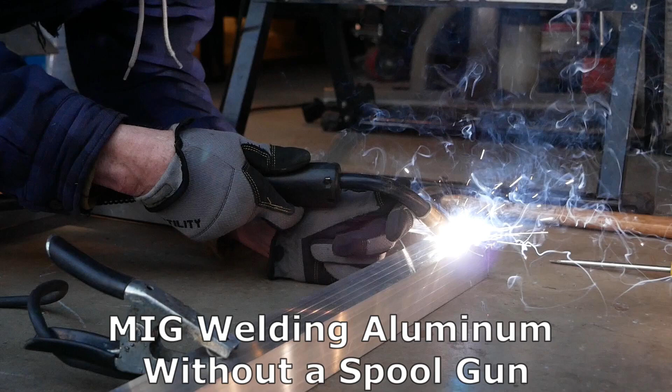Hi folks, today I'm welding together an aluminum frame on which my hot water tank will be mounted, and all that's going inside the lazarette locker on this Pacific Seacraft Orion 27 you see behind me. I'm a pretty much beginning hobbyist welder.

I'll be again welding with aluminum, and this is with a Hobart 140 MIG welder that does not have a spool gun option. So I'd like to go through some tips I learned the hard way. Hopefully it'll save you some time and frustration in using this welder for aluminum. And I'd like to say, please follow safety instructions that you'll find in the manual and not what you might see me doing in my activities on welding. So with that, let's go see what I have for the setup on this 140 Hobart MIG welder welding aluminum without a spool gun.

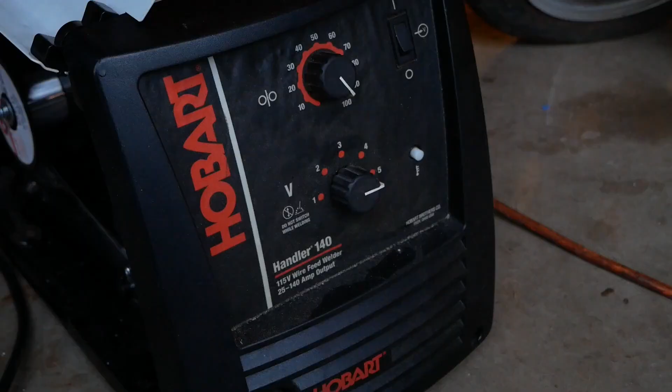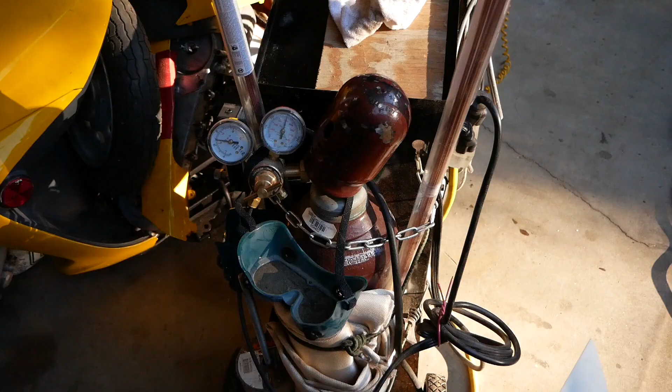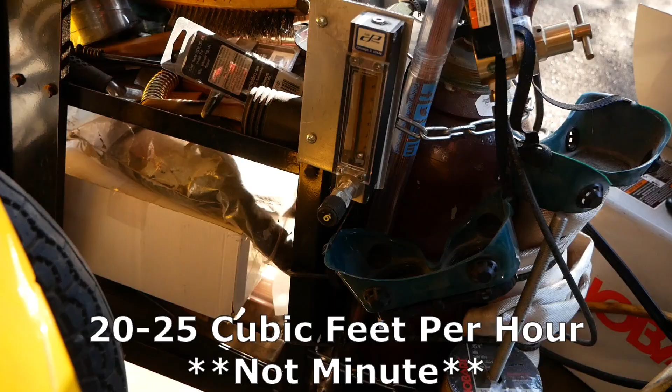So here are my settings. I'm welding again 1/8 inch aluminum angle bar. I'm at 5 for voltage, 100 on the feed rate. As I mentioned, I'm using 100% argon. That's my tank pressure. That's secondary pressure going out of the regulator. And when this is in operation, my flow meter will register about 25 or 20 on cubic feet per hour.

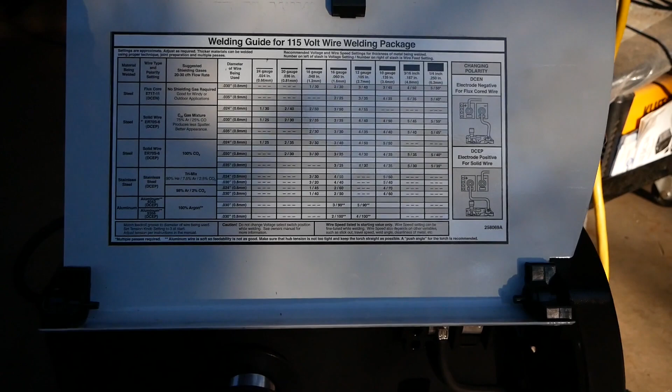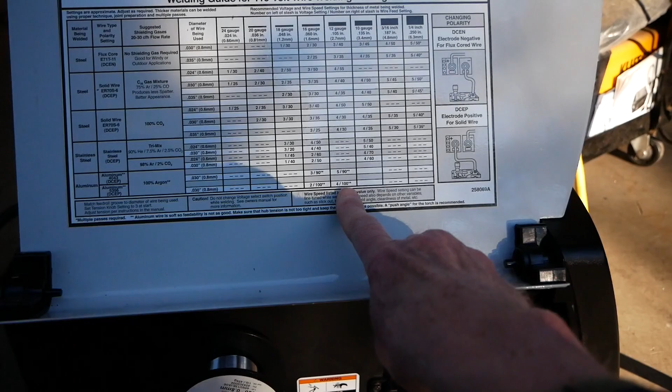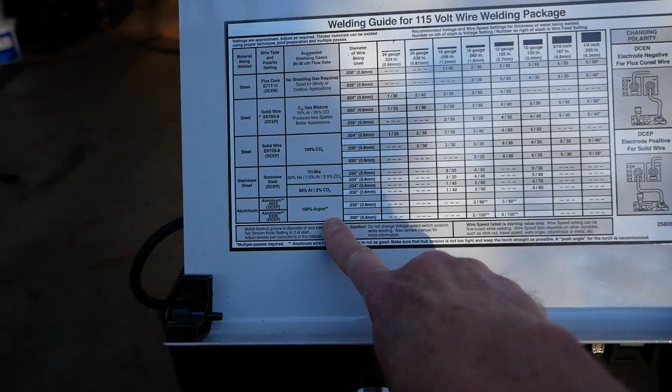As I mentioned, I'm welding 1/8 inch aluminum angle. So I'm a bit at the top of this. I'm running at actually 5 and 100 instead of 4 and 100 or 5/90. I'm using 4043 for welding wire. I'm using 100% argon. And I've set up for DCEP, that's electrode positive, as you can see here.

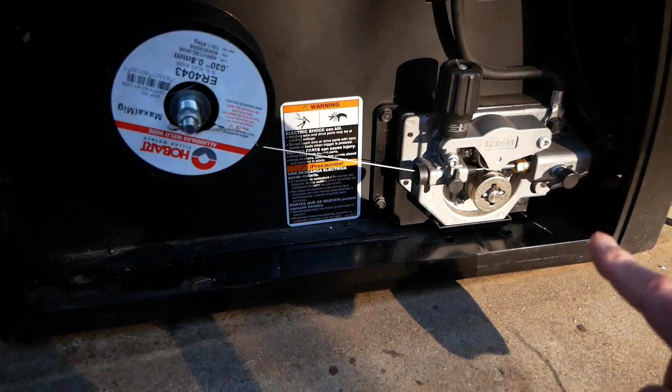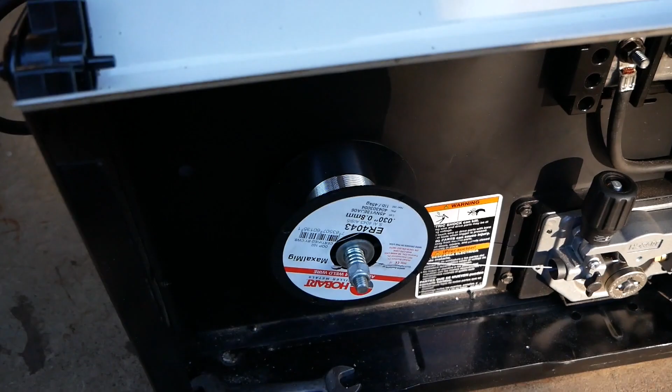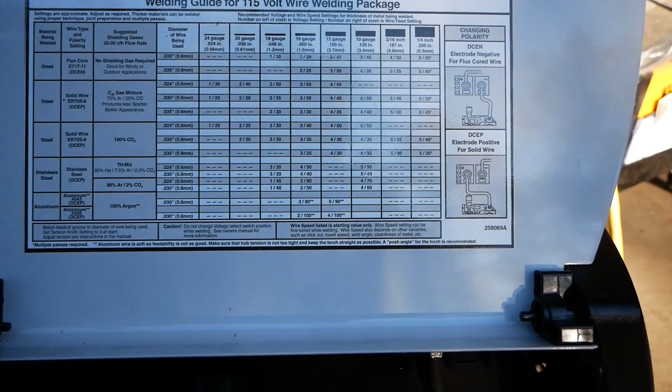And I have my tension at the top of that 3 down there on the dial. I set my groove on my wheel, and this tension on the spring is moderately tight. It's not real tight. Anyway, that's my setup down here inside the box. And 0.030 wire, and I'm using a 0.035 tip.

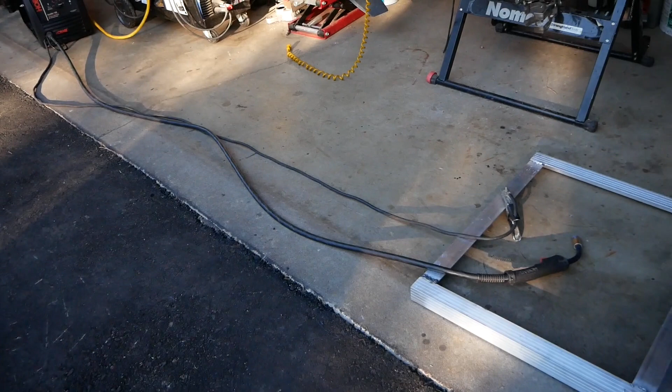Probably the most important thing in running this welder without a spool gun is to make sure that torch cable, which is about 10 feet long, is about as straight as you can tolerate. You will need, of course, to bend it a little bit in order to run the torch, get the tip in the right position. But in welding this frame, I have had no snags, and by snags I mean the bird's nest that'll happen inside the cabinet when the wire is not feeding through.

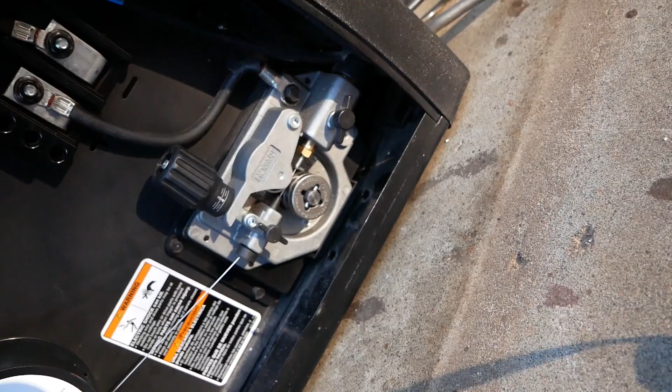This torch cable is standard. It comes with the 140. It does not have a Teflon liner. That is recommended if you're working with aluminum because it's a bit slicker than the metal liner that comes standard, as you can see down here, that's feeding the torch cable. Anyway, let's do a little bit of welding.